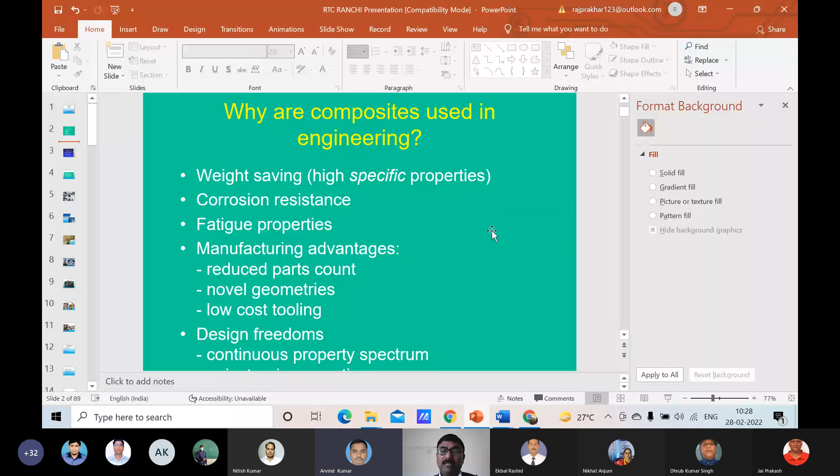Full screen is visible, Arvind? Yes sir, now it is visible sir.

So it is weight saving, then corrosion resistance, it has fatigue properties, manufacturing advantages, reduced parts count, novel geometries, and low cost toolings, design freedoms, continuous properties spectrums.

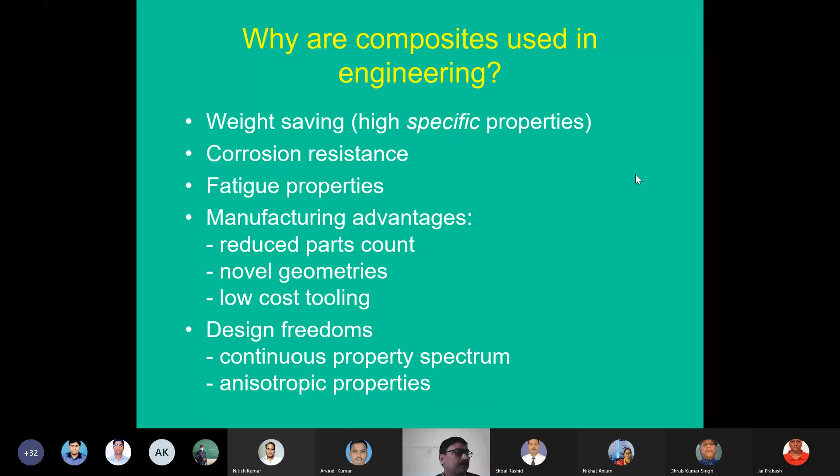So for composite materials, the fundamental consideration is how do composite materials differ from other engineering materials? What are the constituent materials and how do their properties compare? And how do the properties of composites depend on the types, amounts, arrangements of the constituents, and how are composite products made, and why do manufacturing aspects matter?

So we have to compare, and after comparing, if we feel that it has better properties, we can go for the replacement.

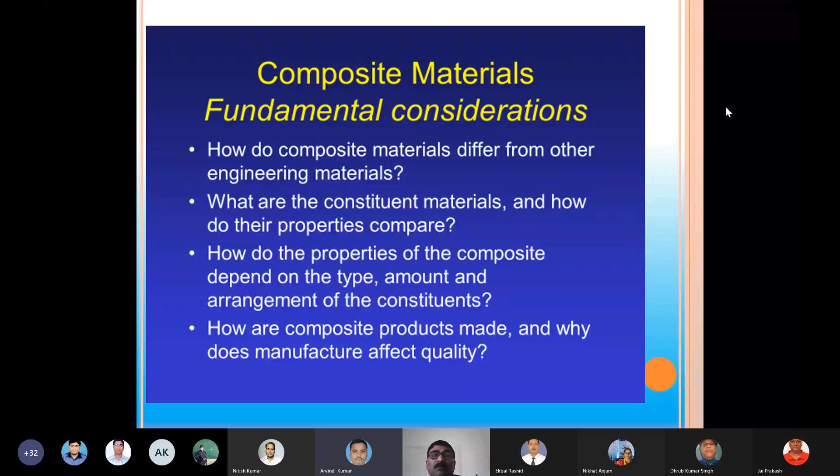But it is not having widespread use. Why is it not widely used? We have a plan, or scientists have planning to replace those alloys by composite materials. Yes, they have had success also, but not in many components or many applications.

The reason is it is costly, there is a lack of design standards, and some production or manufacturing constraints also play an important role in it.

So if you see the composites, there are two constituents in that. One is the matrix, another is the reinforcement.

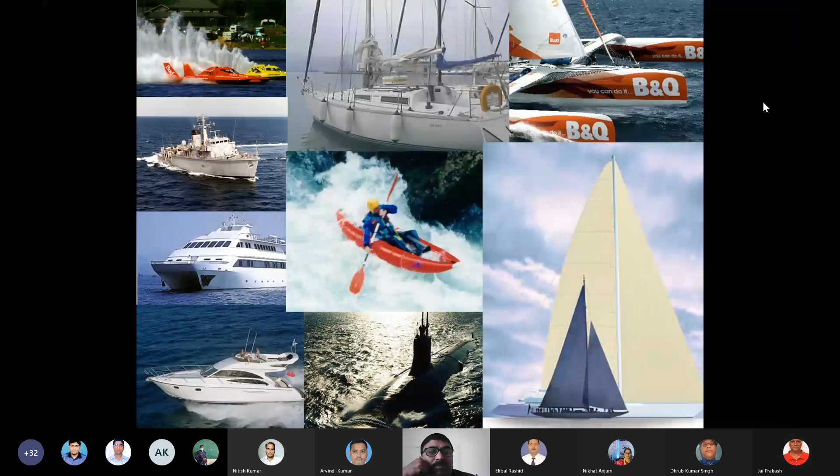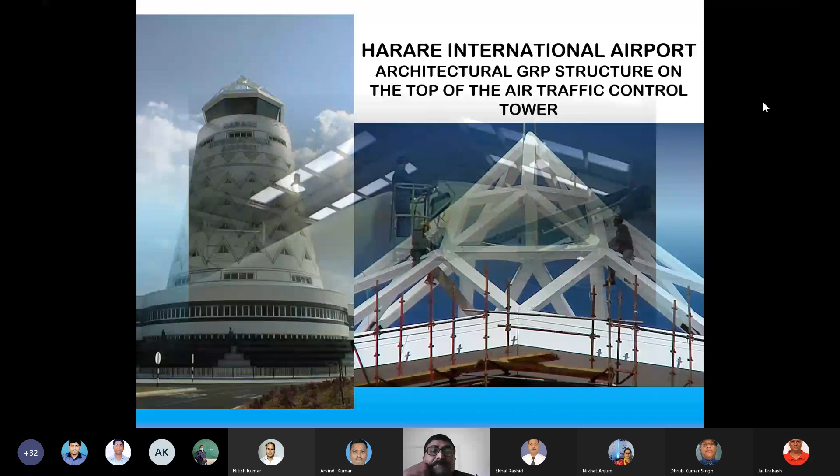So there we can use these applications. Now in constructions also it is used.

If we talk about the advantages, it has aesthetic appeal, ability to mold complex shapes, better surface finish, and lightweight, durability, and corrosion resistance. So these are the advantages of this.

So there is huge potential for polymer composites in civil engineering. But our topic is to go into metal matrix composite, that is aluminum based.

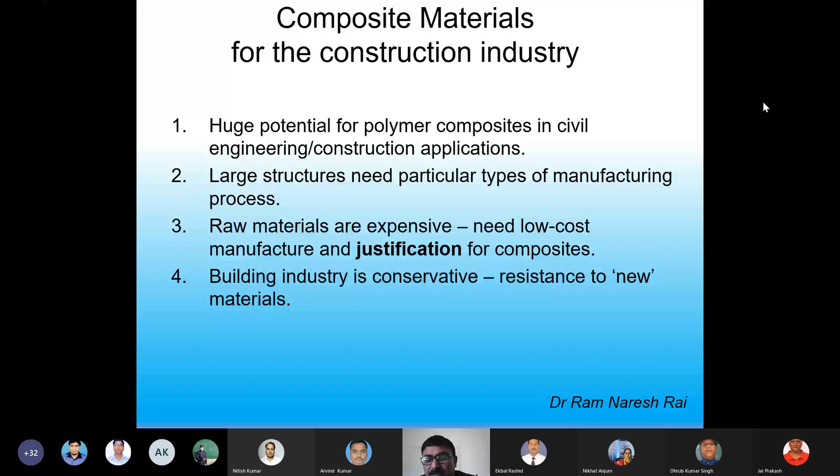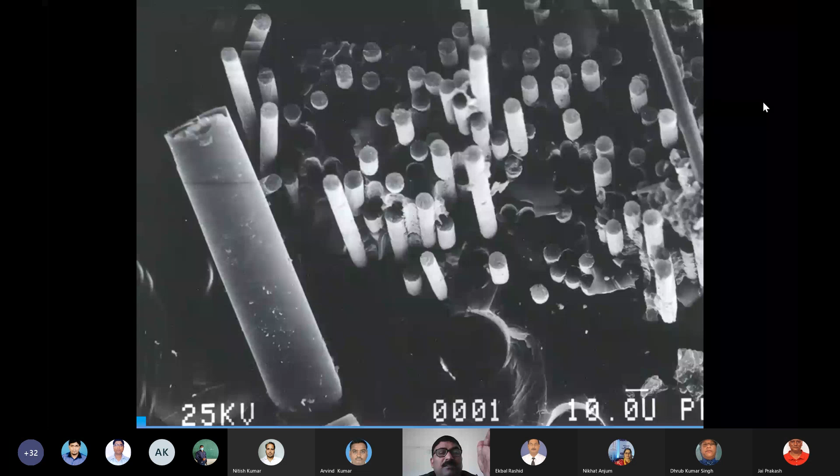And nowadays these composite materials are called novel materials. The materials which are used in the present era for construction, engineering, and scientific purposes are called novel materials.

And if you remember, in the stone age, there was stone, wood. So slowly development has taken place. Then wood, polymers, ceramics, and other applications. So materials have a controlling role in all fields of engineering.

The reuse and recycling components of novel materials is often very poorly thought out. However, the appeal is to the environmentally conscious, for example, products that can be recycled or biodegraded.

So in the present era, rechargeable lithium batteries, you are all aware that cars or automobiles are coming as electric.

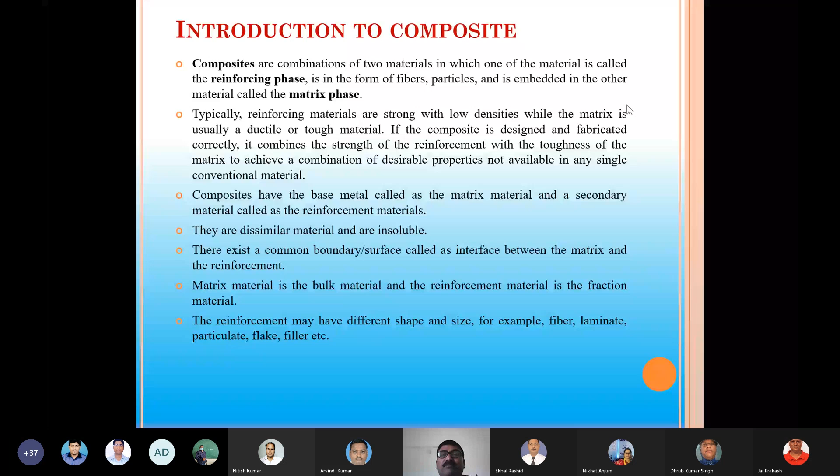If you see the function of the matrix and the function of the reinforcement, we find this binds the fiber together. In RCC structures in civil constructions, you will see cement, sand and water as the matrix, and the rod is the reinforcement. It works as a fiber, but the cement and others are holding those fibers.

Similarly, in metal matrix composites, we have fibers and matrix. It may be aluminum based, magnesium based, or copper based, depending on it being ductile in nature. It should not be hard or brittle in nature. So those materials are chosen as matrix material, and they have different functions.

The other section is the reinforcement. Those reinforcements may be particles or fibers, and they have certain properties or certain functions. So let's talk about the functions of each, that is matrix and reinforcement.

The function of the matrix is to bind the fiber, meaning it holds the fibers and provides rigidity and shape to the structure, and isolates fibers to slow crack propagation. It also provides surface quality, corrosion and wear protection for the fibers, because aluminum, copper or magnesium are corrosion resistant. These are properties the matrix supplies.

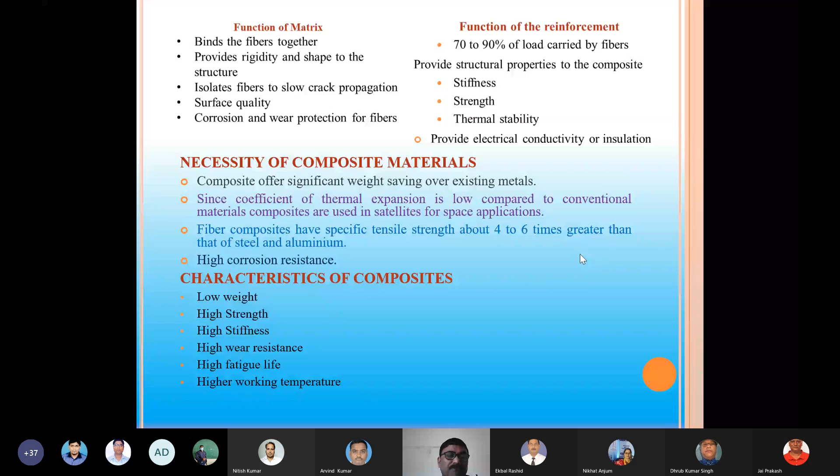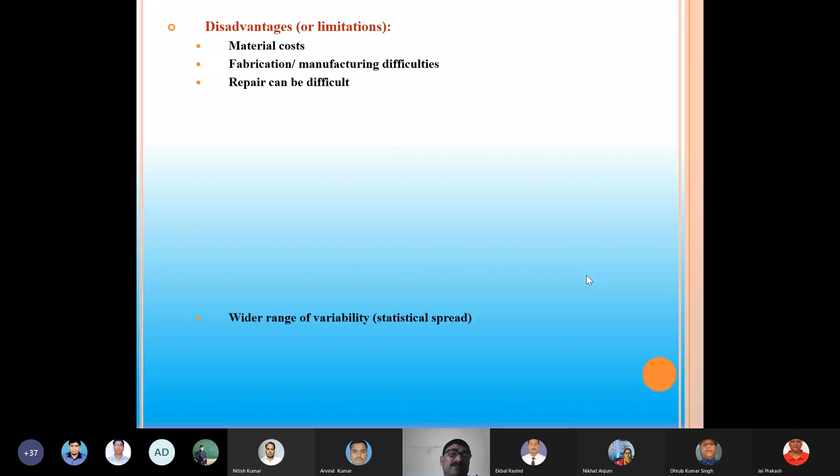Now we'll talk about the disadvantages. Of course, cost is one factor, and fabrication is another factor with cost effects. Repair can be difficult in the case of composites, and there is a wider range of variability. Operating temperature can also be an issue for polymers, if it is a polymer we cannot go beyond about 500 Fahrenheit, but if it is a metal matrix, we can go up to 2700 Fahrenheit.

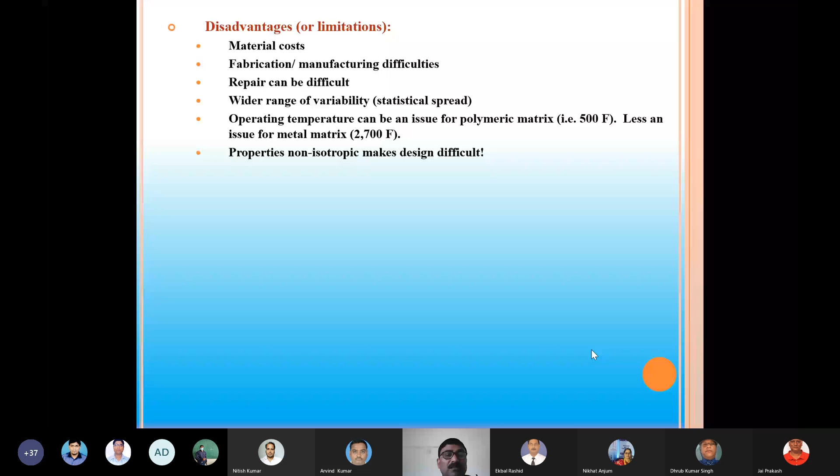Also, the non-isotropic properties make the design difficult, and inspection and testing are typically more complex.

Now we'll see the classification of composites according to the morphology of the reinforcement. If we talk about the reinforcement and its arrangement, we see the unidirectional fiber composite, where the fibers are aligned in one direction, giving strength in that unidirection.

If we talk about the second type, laminated composites, mostly now they are being replaced, but on railway stations, in cinema halls, or on different occasions and places, you will find chairs made of laminated composites.

Then there is the short fiber type, where fiber size is small, and then there is the particulate style.

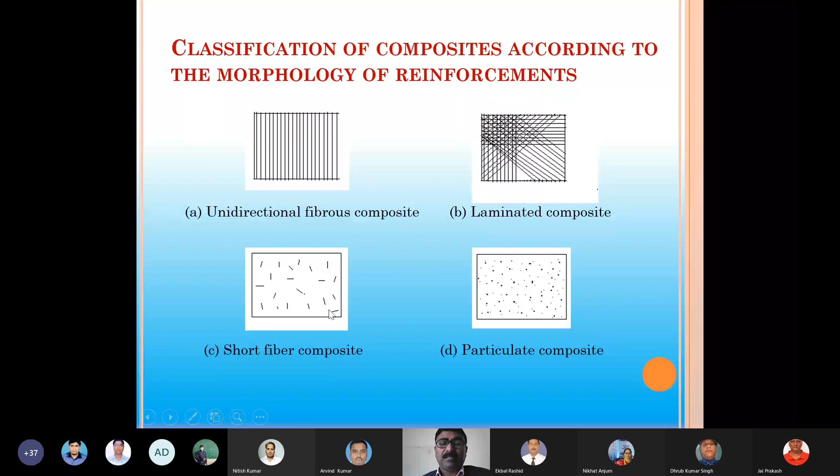And if you see the alignment of those particulates, there is continuous alignment and there is the random one, as compared to continuous.

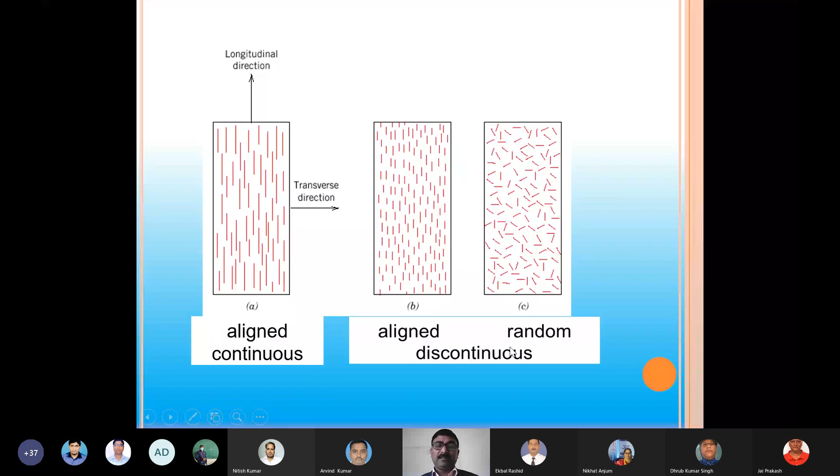Now the matrix has certain properties and the fiber has certain properties. As I said in the definition itself, by combining both individual materials, it gives a certain strength which has engineering applications.

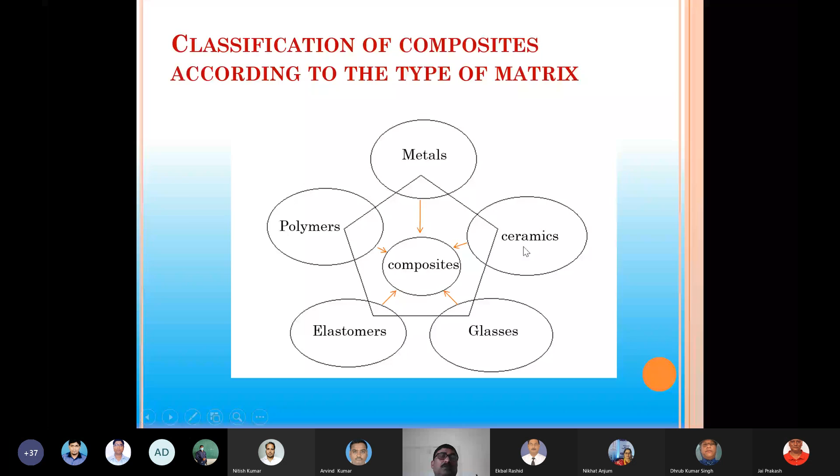Our aim is to focus on metal matrix composites. The metal matrix could be aluminum, titanium, magnesium, iron, copper, or nickel. Examples include aluminum silicon carbide.

These have wide applications nowadays. Aluminum oxide - here aluminum is the base matrix and titanium carbide (TiC) is the reinforced particle. Here aluminum oxide is the reinforced particle, here silicon carbide is the reinforced particle. B4C - boron carbide - I think Arvind has worked on this. If boron carbide is added as reinforcement in the aluminum matrix, we get boron carbide composites. If titanium carbide is added into magnesium as the matrix, we get magnesium matrix composites.

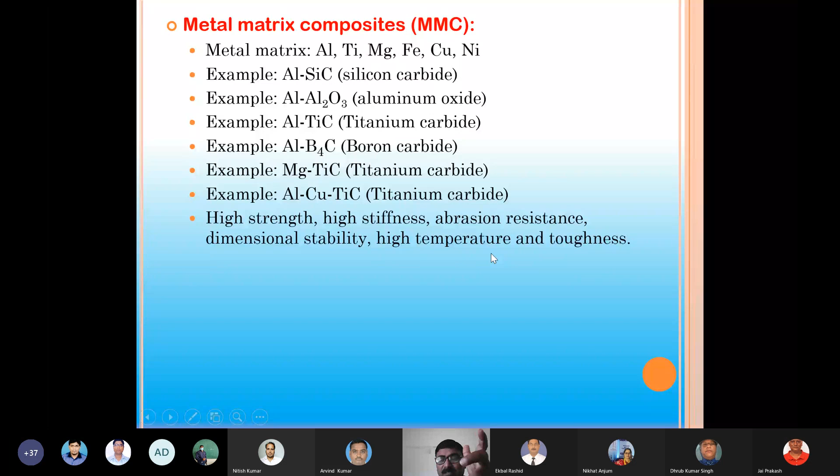Metal matrix composites are a class of materials with the ability to blend the properties of ceramics - high strength and high modulus - with those of metals or alloys, to produce significant improvement in the mechanical performance of the composite over monolithic metals or alloys.

Aluminum alloy based metal matrix composites reinforced by hard ceramic particles have become attractive for automobile and structural applications. The addition of ceramic particles such as titanium borides, titanium carbide, titanium nitrides, silicon carbides, and aluminum oxides to an aluminum based matrix does not considerably change the density of the material, but usually leads to a significant rise in specific strength and modulus of the composites.

As shown in these examples - silicon carbide, aluminum oxide, titanium carbide - these materials can withstand high temperatures and contribute high strength, and also have very good wear resistance. So in engine rings or areas where wear needs to be minimized, these can have applications. In recent years, aluminum-magnesium, aluminum-titanium, aluminum-copper, and aluminum-silicon based metal composites have become very popular.

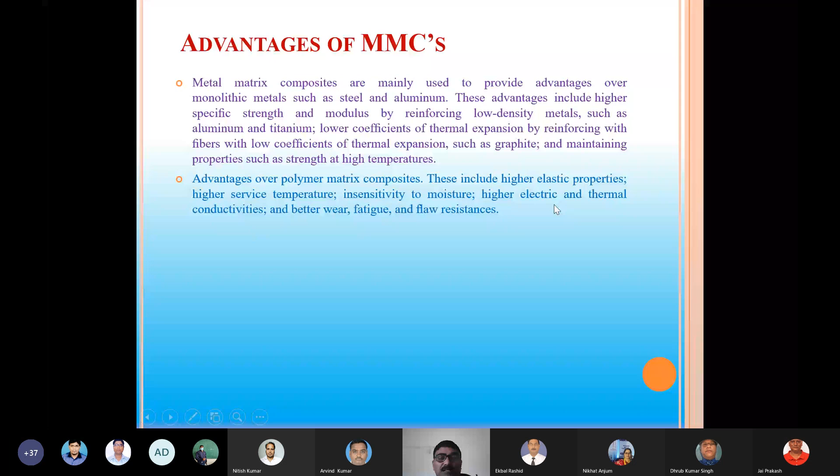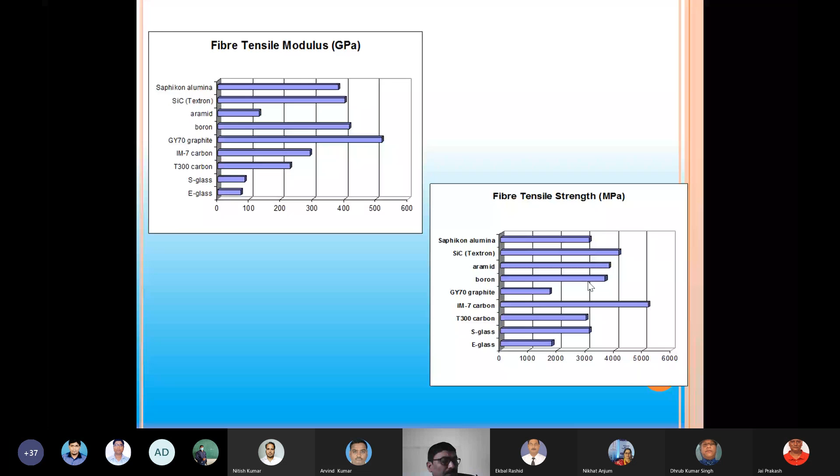So now you are all aware about the matrix. Based on the matrix, you have different composites, and then you have the metal matrix composites. In metal matrix composites, you have seen aluminum, copper, magnesium, and so on as the matrix, and reinforced particles like titanium, silicon carbide, aluminum oxides, or boron carbides. But processing is also one of the factors which plays an important role, a great challenge to industries, so that it should have minimum cost and wide applications.

So there are different processing techniques with the help of which we can manufacture aluminum based metal matrix composites. Traditionally, discontinuous reinforced metal matrix composites have been produced by several processing routes such as powder metallurgy, spray depositions, mechanical alloying, and various casting techniques such as squeeze casting, rheo casting, and compo casting. One method is the in-situ technique, which Arvind used while doing his research work at NIT Agartala. So there are different techniques by which one can manufacture alloys.

It is widely recognized that the properties of the metal matrix material are controlled by the size and volume of the reinforcement, as well as the nature of the matrix-reinforcement interfaces, as we have discussed.

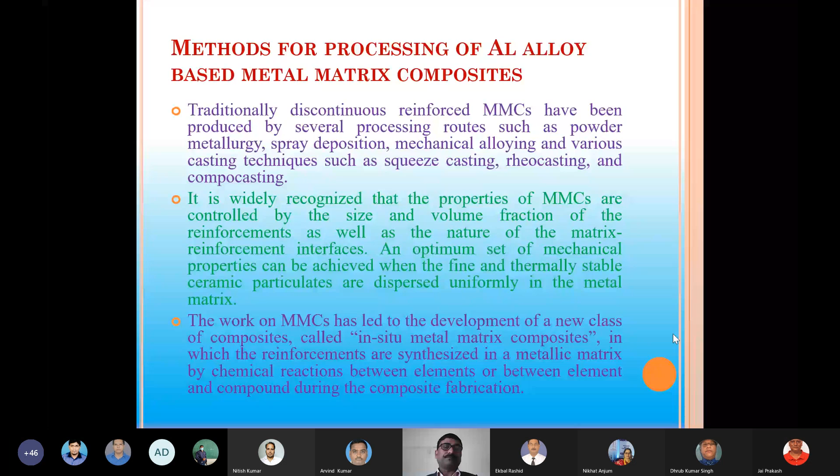A variety of processing techniques have been developed over the last decades in an effort to optimize the structures and properties of in-situ ceramic phase reinforced metal matrix composites. However, the terminology in the literature for the processing routes is inconsistent and confused. Koczak and Premkumar have suggested that in-situ reactions can be categorized in terms of starting phases such as gas-liquid, liquid-solid, solid-liquid phases, but an effective categorization and naming of the processing routes has not so far been established.

So many researchers are further working; however, they are developing by following the gas-liquid, liquid-solid, or solid-liquid way. Just a minute, audience please, give one minute.

We categorize the processing methods used to manufacture in-situ metal matrix composites according to the temperature of the metallic matrix and the reactants during processing. Now you may be aware that there's in-situ and another way called ex-situ.

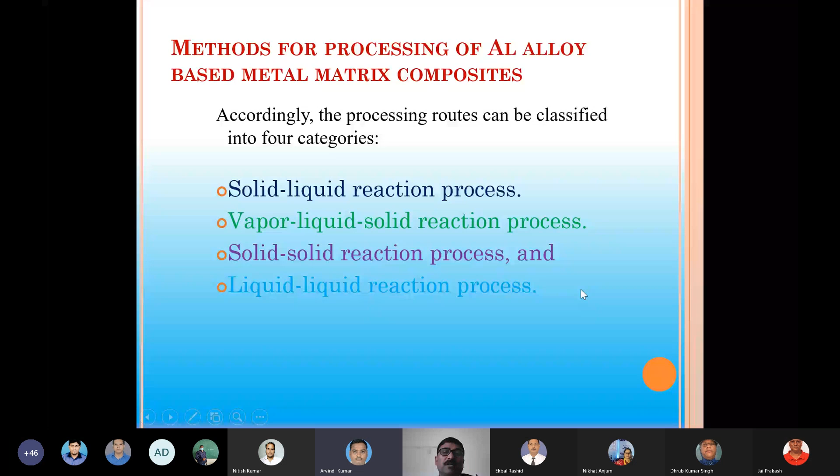Solid liquid interaction means reaction process. In this process, reactants like elements or compounds react in-situ to form reinforcement phases in the presence of a third liquid, the metallic phase, and reactants react with some components in the melt to form in-situ ceramic reinforcement particles. That way you can develop the composite materials.

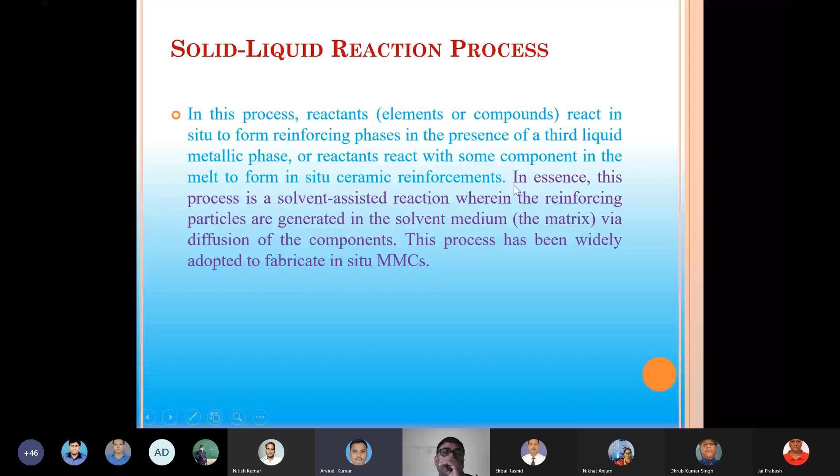Another way is solid liquid reaction, meaning the liquid is the base matrix, and if you add a solid like B4C, TiC, or aluminum oxide, a reaction will take place between the solid and liquid to form the solid liquid reaction. That, in other words, is called ex-situ.

According to the processing features, this process can be further divided into small groups. Some frequently used processes are: self-propagating high temperature synthesis, exothermic dispersions, reactive hot pressing, combustion assisted casting, direct reaction synthesis, flux assisted synthesis - these facilities are available in our lab, flux assisted synthesis is what students are doing here - and rapid solidification processing.

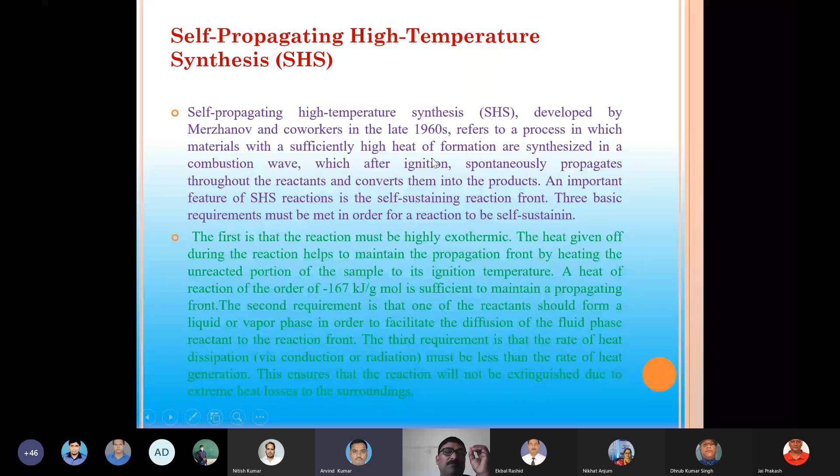Self-propagating high temperature synthesis was developed by Merzhanov and coworkers in the late 1960s and refers to a process in which materials with a sufficiently high heat of formation are synthesized in a combustion wave after ignition. These are the different ways of processing.

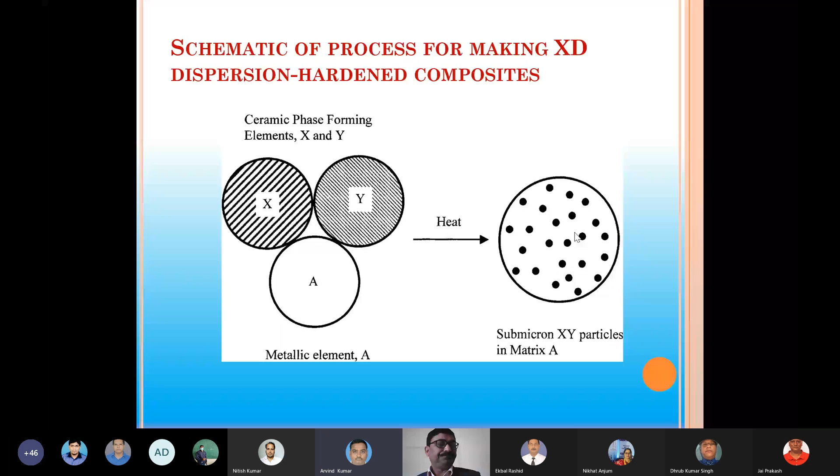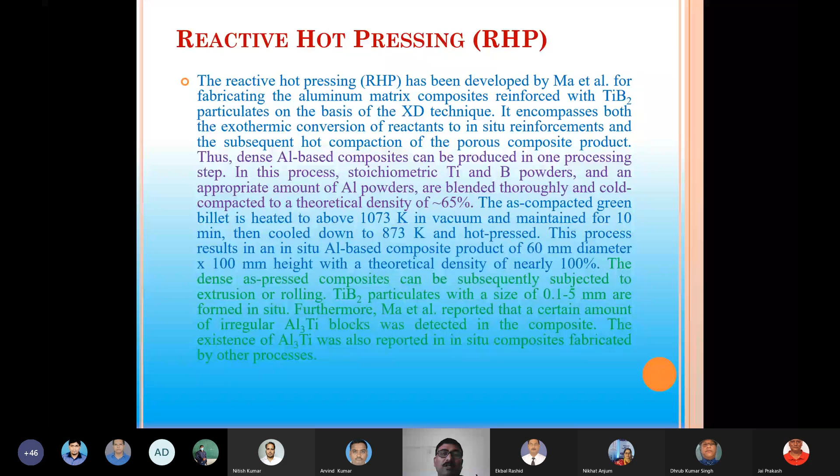The reactive hot pressing technique was also developed by scientists - TiB2, titanium boride particles, can be developed on the basis of XD techniques. It encompasses both the exothermic conversion of reactants to in-situ reinforcement and subsequent hot compaction of the porous composite products. You might have heard nowadays about metallic foam - this is one of the products that can be developed by these techniques.

Then there's combustion assisted casting - I will share this slide with you. Then direct reaction synthesis: this refers to a process in which reactant powders, or compacts of reactant powders, are directly added into the molten metal, and ceramic reinforcing particles are formed in-situ through exothermic reactions between the reactants and between the reactant and some components of the metal. This is another processing method.

Then flux assisted synthesis.

Here we can use potassium tetrafluoroborate and potassium hexafluorotitanate. These halide salts are used to enhance the interface reactions, or the interface bonding between the titanium and the borons, which improves the properties.

After the reactions, stirring is stopped in order to remove the slag containing the halide. This slag at the top is removed from the molten composite, and it is cast into a mold.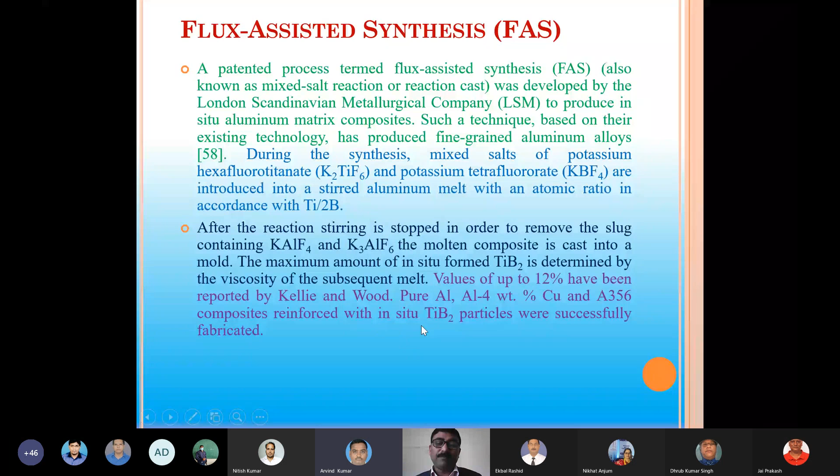The maximum amount of in situ formed TiB2 is determined by the viscosity of the subsequent melt. Values up to 12% volume fraction have been reported. Pure aluminum and aluminum with 4% copper, and A356 composites reinforced with in situ TiB2 particles, were successfully fabricated and have wide applications.

So for the flux assisted synthesis, these facilities are available in our lab, and our scholar has used these facilities.

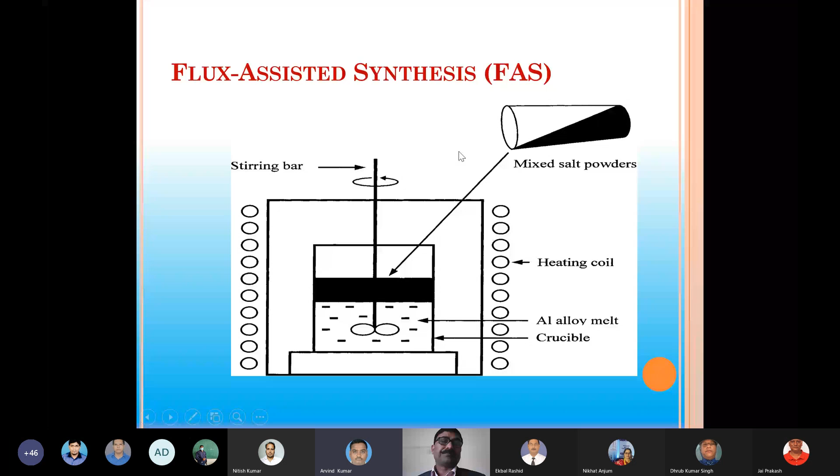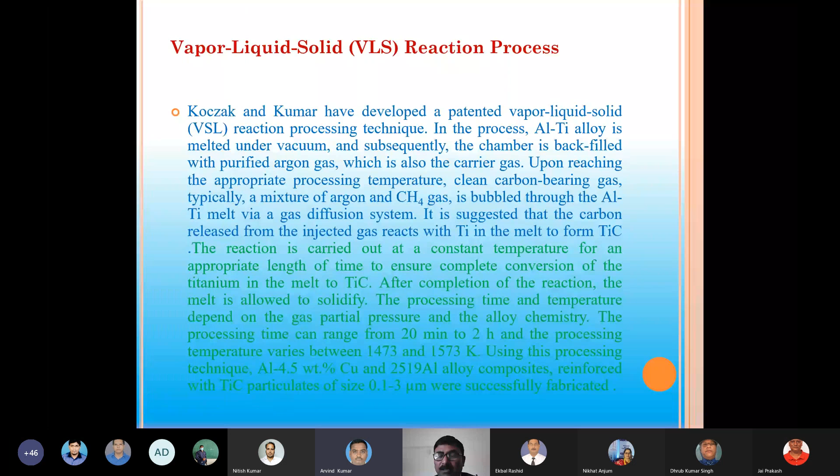Rapid solidification process, and then introduction to vapor liquid solid reactions. There are different processes by which one can develop these composite materials. I'm not going to talk much about this.

Mechanical alloying - since you are all mechanical engineers, you might be knowing this method, where powders are taken from different elements and then alloyed using ball milling machines. This gives us mechanical alloying, a solid state powder processing method.

In this case, different powders of individual elements are taken and placed into the ball milling machine, where mechanical alloying occurs, and later it is compressed, and then we get the composite materials.

This solid state powder processing method involves repeated cold welding and fracture of the particles as a result of high energy ball-sample collisions. This method can be used to produce fine grained alloyed powder particles in metals and metal ceramic systems.

My dear participants, by these methods we cannot go for mass production or bulk production. For small components where high properties are required, this mechanical alloying process can only be used.

The reason is, we have two individual particles in the solid state, and in mechanical alloying there are different balls that compress those particles. Those particles collide with each other due to high energy ball-sample collisions, and then they get impacted, and then you get this result.

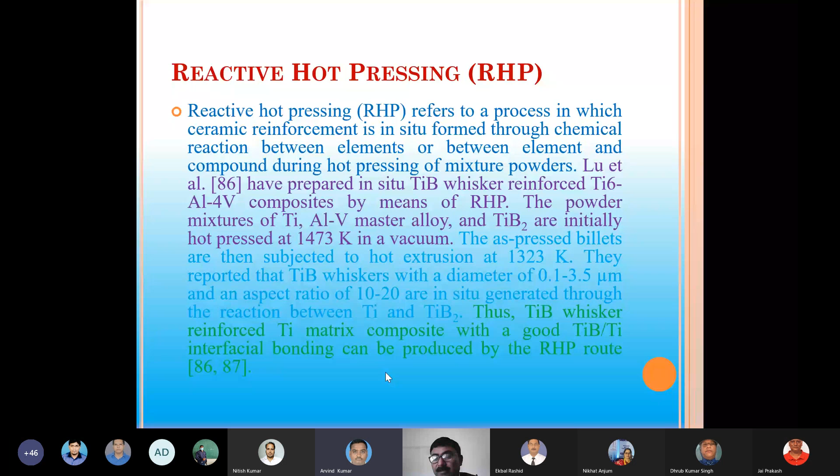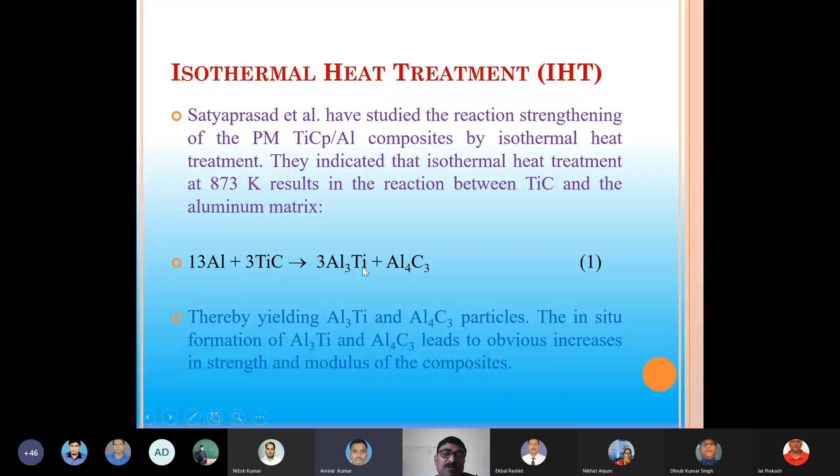Isothermal heat treatment process, where aluminum reacts with carbon and titanium carbide, forming titanium aluminide and aluminum carbide, as shown in equation 1. At lower temperature this is available, but at higher temperature, titanium aluminide decomposes and titanium separates out, and this titanium reacts with carbon to form titanium carbide.

Then the liquid reaction process. Now let's talk about the applications.

Applications of metal matrix composites include space, military, and transportation applications. In space, boron aluminum tubes are used in support of the fuselage frame, in addition to decreasing the mass of the space shuttle by more than 145 kgs.

For military applications, metal matrix composites such as silicon carbide aluminum composites satisfy the requirement because they have high micro-yield strength. In addition, the volume fraction of silicon carbide can be varied to achieve a coefficient of thermal expansion compatible with other parts of the system assemblies.

For transportation, metal matrix composites are finding use in automotive engines that are lighter than their metal counterparts, as well as in automobile, marine, electrical and electronics, sports, and space applications. These are some examples of where composite materials find applications.

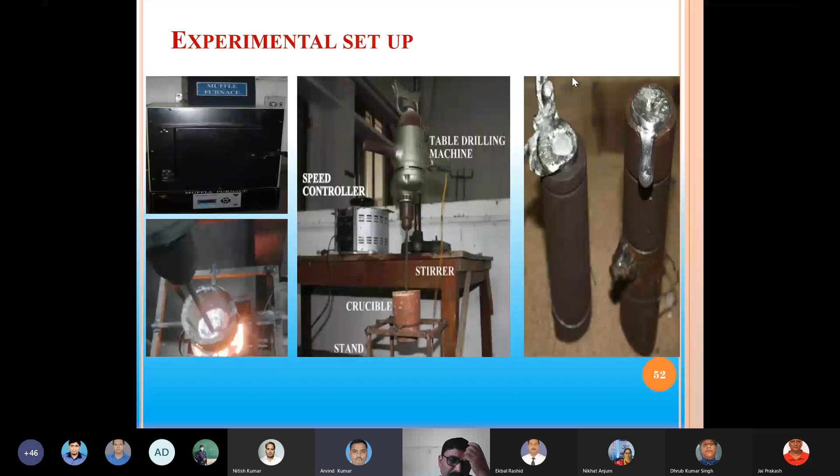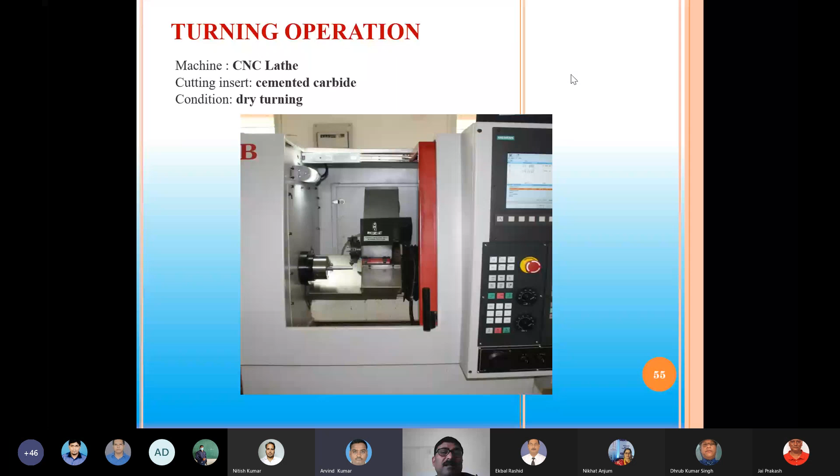We have facilities where the materials are prepared, and they have done hardness testing and turning operations. We have the facility for this, and they have used this lab.

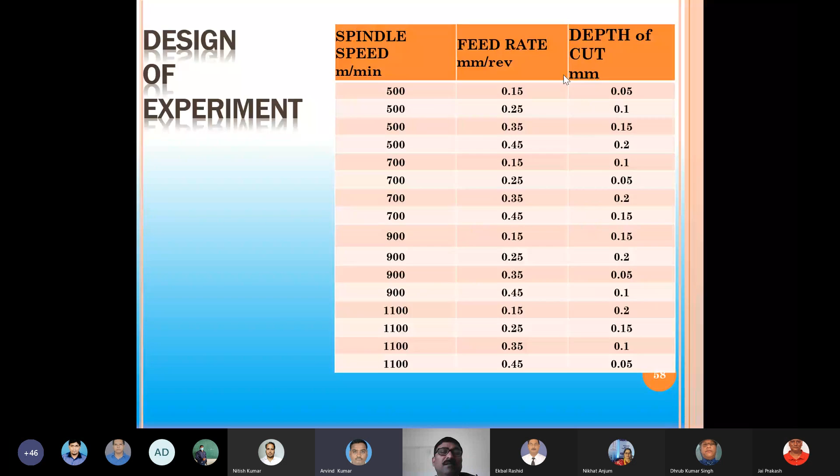They used design of experiments, performed the experiments, and then proceeded to machining operations. During machining, we observe differences depending on the material type.

If we machine ductile materials versus brittle materials versus composite materials, we find different orientations of the chips that come out. For example, in ductile materials, the chips formed are continuous but of irregular shapes.

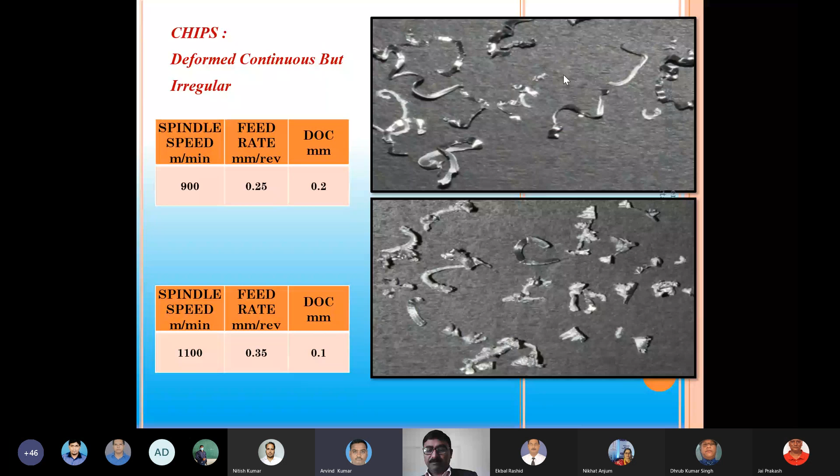These are the different spindle speeds and feed rates they have taken, along with further observations. When using composite materials, the chips are discontinuous type.

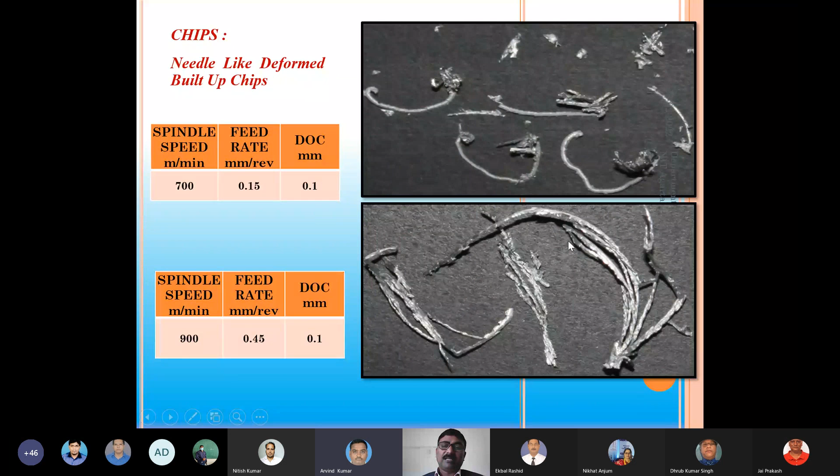Here is the case of aluminum silicon carbide, and this is aluminum titanium carbide, and so on. Overall, once you machine these aluminum-based materials, you will find that tool blunting takes place, or the tool life will be reduced.

Here my friend has shown results once they machined this composite with only 1.5% silicon carbide, compared to the pure alloy, and also with 1.5% titanium carbide. We observed that in these cases the tool life will be better, meaning the edges are less distorted.

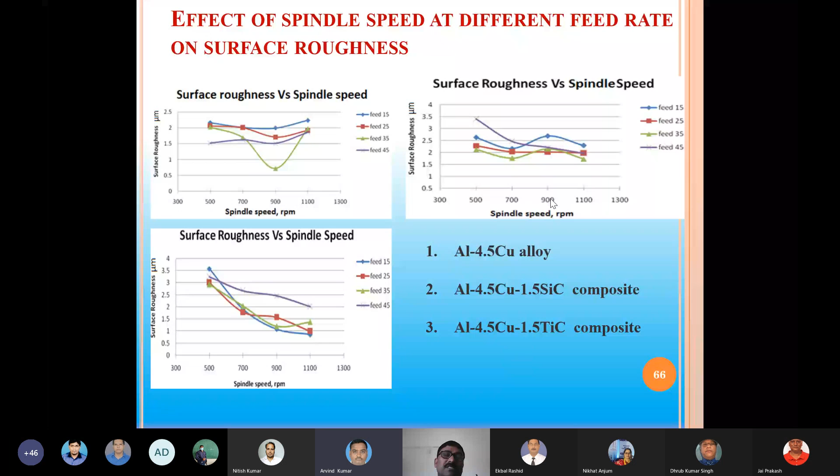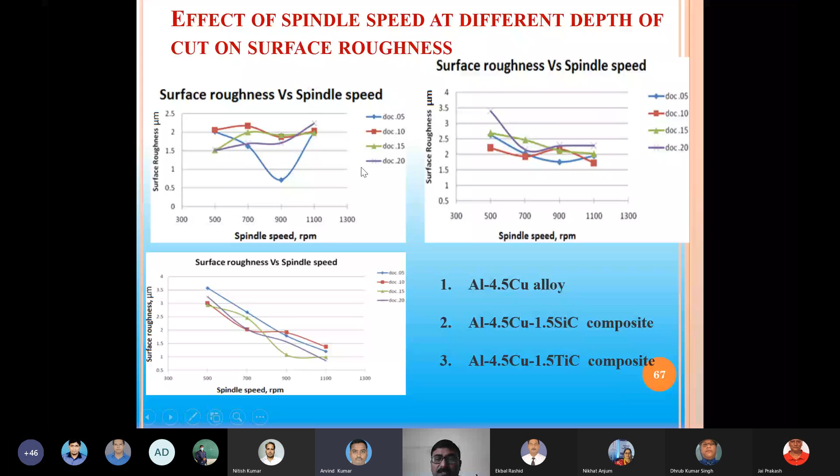Then the effect of spindle speeds at different feed rates on surface roughness. They have graphical representations about surface roughness versus spindle speed, along with their observations. If you see those surfaces, we have a 3D profilometer in our lab.

There you can see the 3D profile of the machined surfaces. It appears as a very nice surface appearance, but if you look at the 3D profilometer data, the surface actually looks like this.

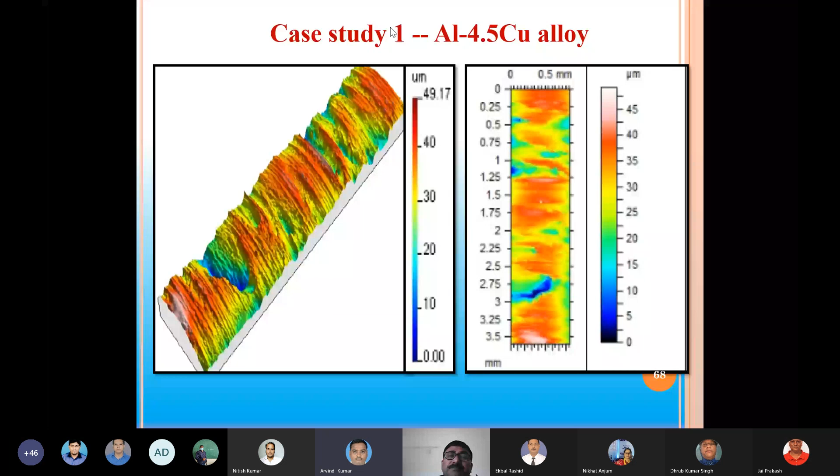These are some case studies of different composite materials: the case of 1.5% silicon carbide composites, and the case of titanium carbide composites, along with their observations.

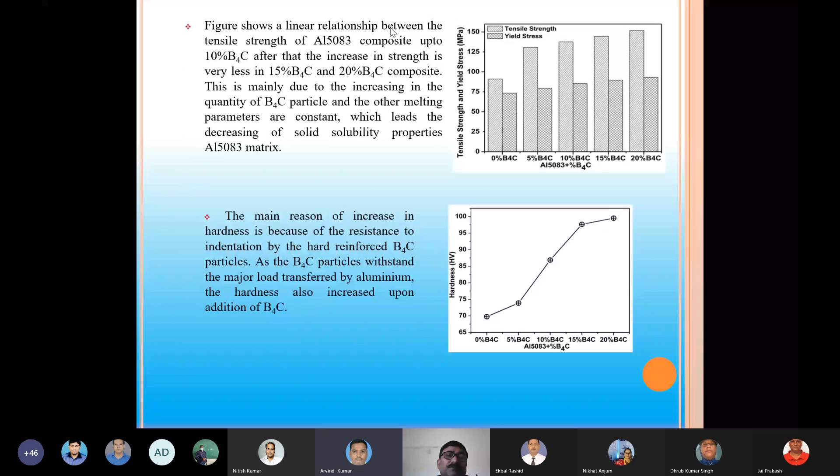Further, they studied the mechanical properties and performed XRD analysis. Another aspect is the optimization techniques they applied, where before optimization they considered parameters like T-on, T-off, and so on.

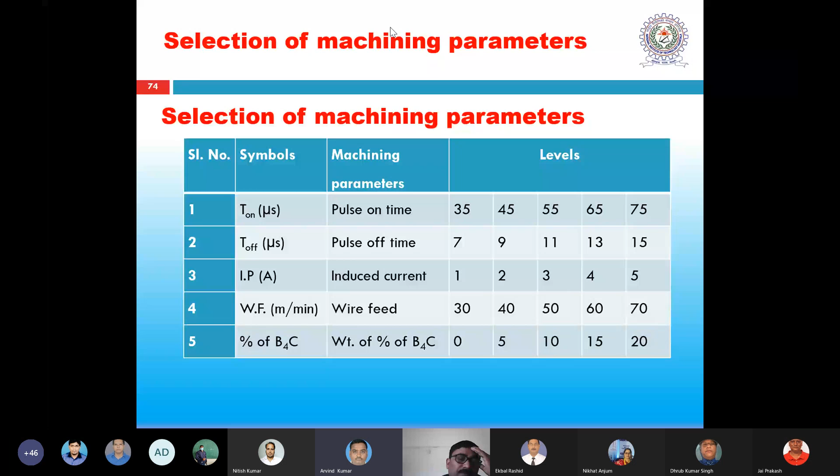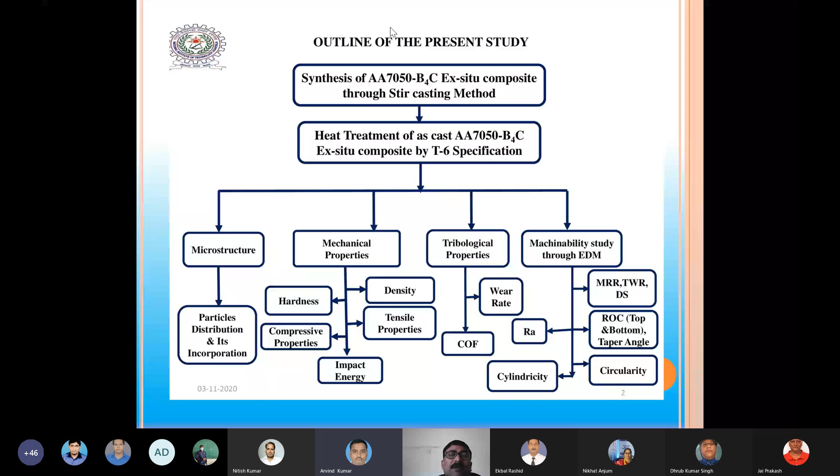This outlines how they started their work and the outline of their project, including the experimental procedure they followed. This is another scholar who performed these experiments in our labs.

And then the tribological properties—Arvind, I believe this is your work, isn't it? Yes sir. So this is the tribological test they performed, and they observed that this material has better tribological properties.

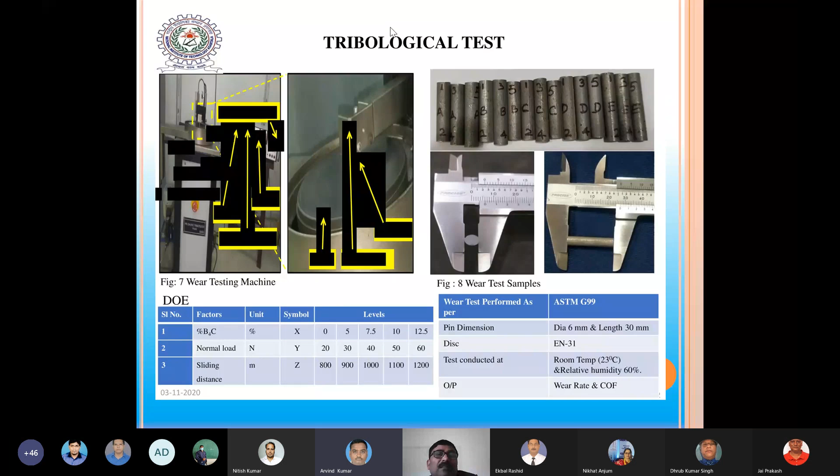Then the die sinking EDM—another student used this technique, and they studied the microstructure of those aluminum-based metal matrix composites, observing the distribution of the reinforcement particles in the structure.

If the distribution of the particles is maintained properly, you get better strength. If the distribution of those particles is not good, as in Arvind's case with B4C particles, the strength is affected.

So the distribution is okay, but if more distributions of titanium carbide particles, boron carbides, or other nitrides are there, then the strength will improve obviously. As per the Hall-Petch equation, as the grain size becomes smaller, the strength becomes better. So there's a correlation of microstructure with mechanical properties.

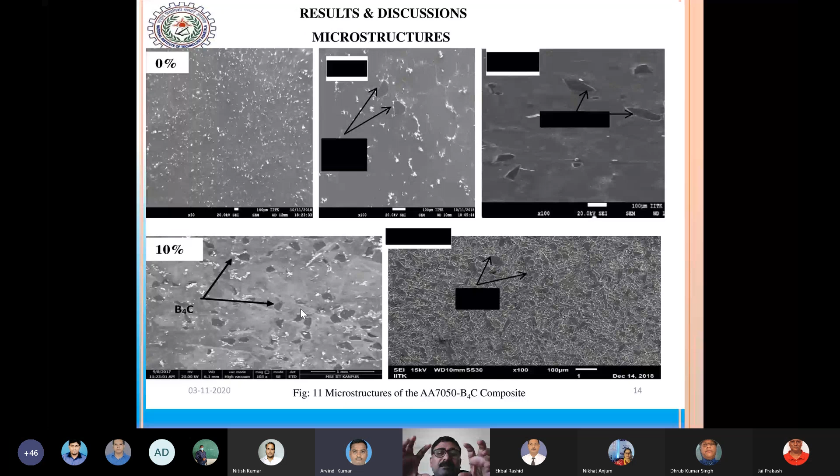These are their observations from TEM and SEM analysis, where they measured density, hardness, and tensile strength. They also noticed about the surface - when they did machining of the surfaces, they observed how cracks or particles flow from these surfaces. Sometimes depending on hardness, it impacts the tip and damages it, making the tool blunt or reducing its sharpness.

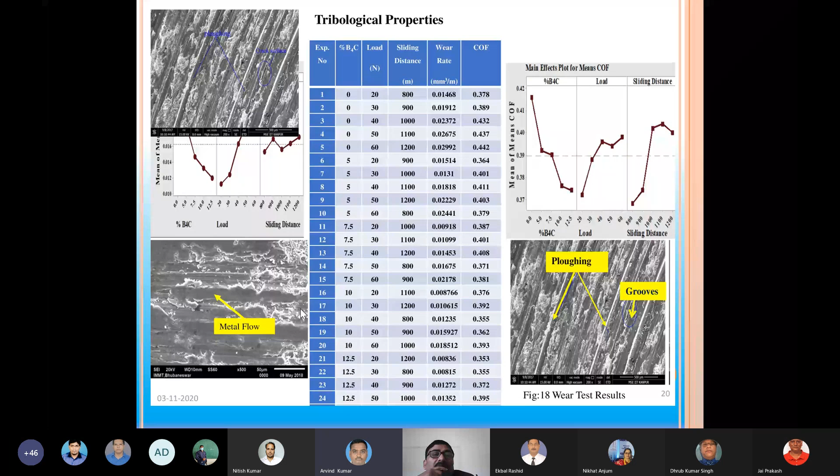And then there's the wear test they conducted, and they also used electro discharge machining and observed the analysis. So by this way they have done some analysis, and these are their conclusions. These slides I will share with you.

If we talk about the observations, the wear rate of aluminum 7050 B4C composites decreases with the addition of B4C in the matrix, and the mean wear rate for the 5%, 7.5%, 10%, 12.5% composites are noted. These are their observations and results.

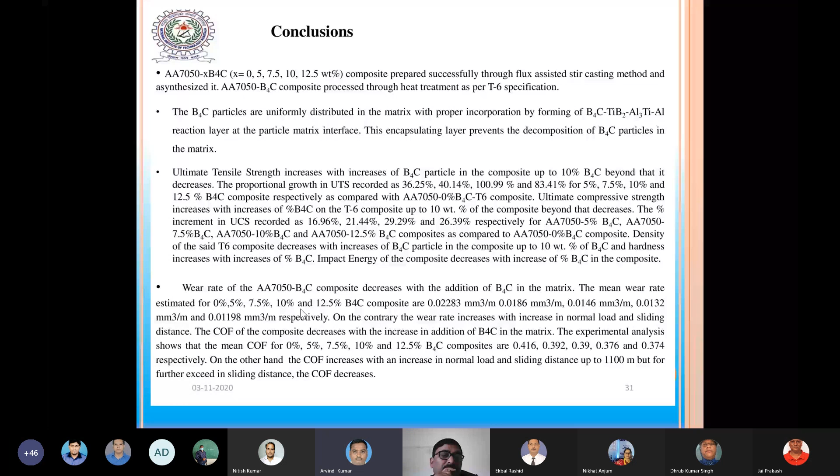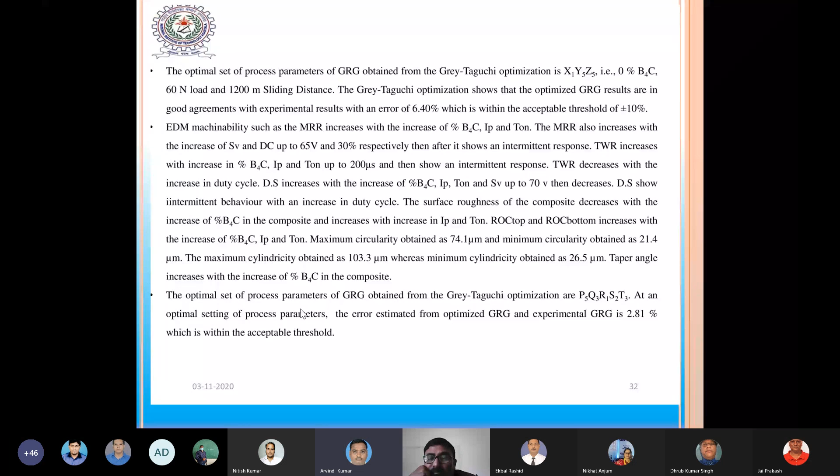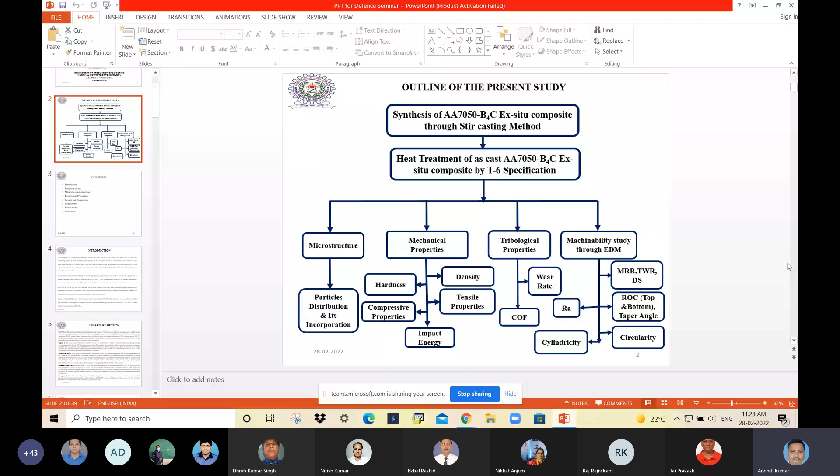And after that, once we got the material, we did mechanical testing to evaluate the composite. So, yeah, not going much into it. One second - so basically, the contents were like this.

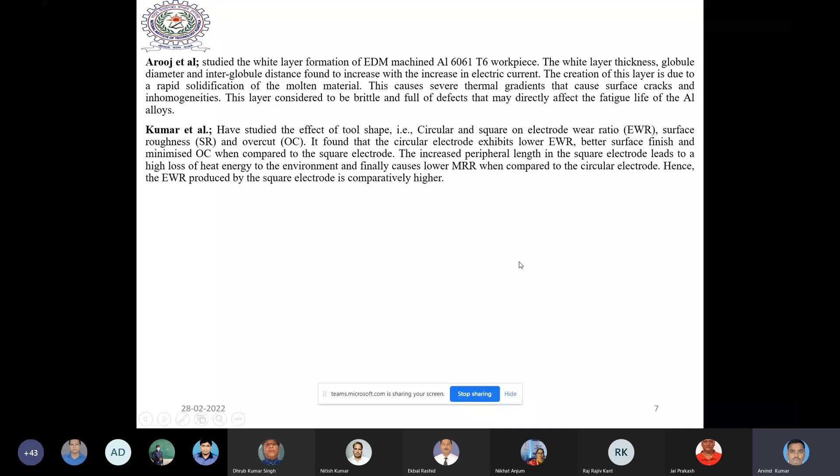As in every PhD work, it happens right from introduction, literature review, motivation and objective, experimental procedure, result and discussion, conclusion, future scope. The motivation was very clear to develop a composite material.

Aluminium alloy B4C based composite material, since B4C has good affinity towards the aluminium. So I have chosen this reinforcement ceramic particle B4C, and the size was 100 micron B4C particles which I have used here.

The objective was also clear to develop a composite. I have gone up to 12.5% of B4C. Then through flux assisted stir casting, we have gone for heat treatment, then several mechanical testing.

Basically for the bond formation mechanism, we have tested through several XRD. Then we have gone for FESEM, and we have established a quaternary layer of B4C, TiB2, Al3Ti, aluminum titanate, and aluminum particle matrix interface, and the microstructure. I have published one paper also on this, and that was highly recognized.

Then we have gone for several kinds of mechanical testings, right from density, hardness, tensile, compressive, and impact test. After that, we have tested the tribological property of the developed composite material, using an optimization method which also proved that the method we selected was good.

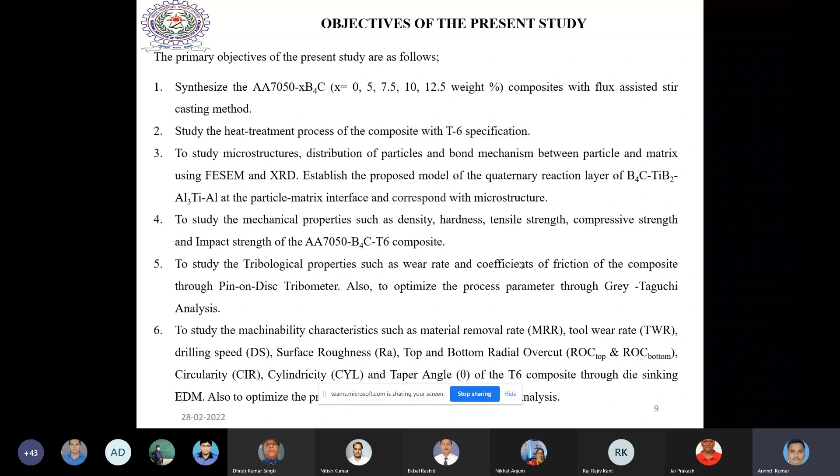And then at last, we have also done the machinability property of the developed composite, with output through electro discharge machining. So basically, this was the experimental setup which I have used.

I have used aluminum alloy 7050. Here, the major alloying element is zinc, that is 5.88. And boron carbide I have used, with size 100 to 150 micrometer.

Since I have mentioned flux assisted, so I have used flux assisted stir casting method. The flux was K2TiF6, that is potassium hexafluorotitanate, and one degasser I have used, that is hexachloroethane. Amalgamating everything together, this is the iron mold I have used. This is the stir casting method which was there at NIT Agartala.

I tried from 700 to 800 degrees centigrade. We should not pour it directly at room temperature. So that heating chamber was developed so their temperature was fixed at 450 to 500, moreover 400 to 450 degrees centigrade.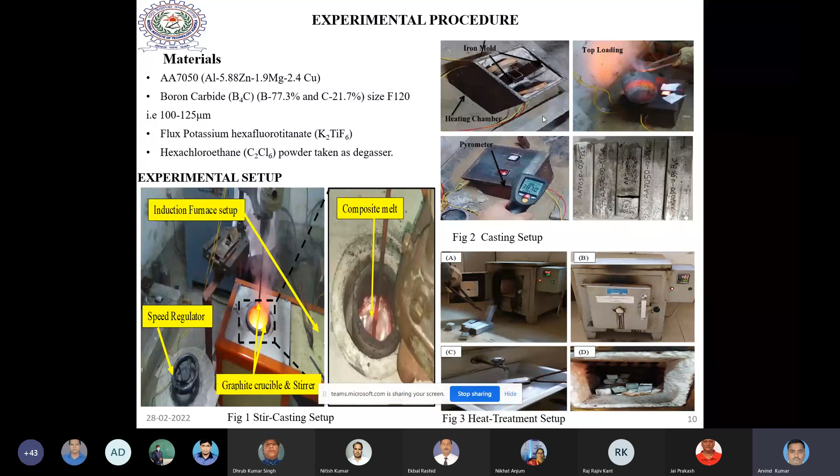Then we poured it in, and we went for slow cooling so as to reduce the shrinkage allowance. Then for heat treatment, I have used this setup. These were the test samples made, and density was checked accordingly.

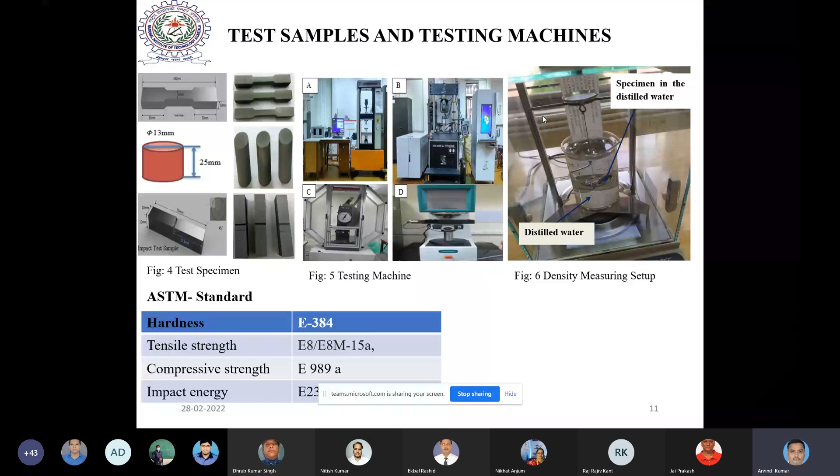This was the tribological setup which Sir has also shown. These are the small components, small size. The size was fixed at 30 in size and 6 diameter, 30 in length.

And this die sinking method I have used. So these were the properties, these were the parameters which I have selected.

This is the composite, and here is the copper pin I have used as a tool. And of course, the hardness of our composite was very high compared to this copper.

And since I have used electro discharge machining, the setup is like this. So the major finding of this composite was here, right from 0%, 5%, 7.5%, 10%, and 12.5%.

I have seen that as I increased the percentage of reinforcement, we have a uniform distribution of this. This distribution has shared the load which was coming on the composite, and hence the load bearing capacity increases.

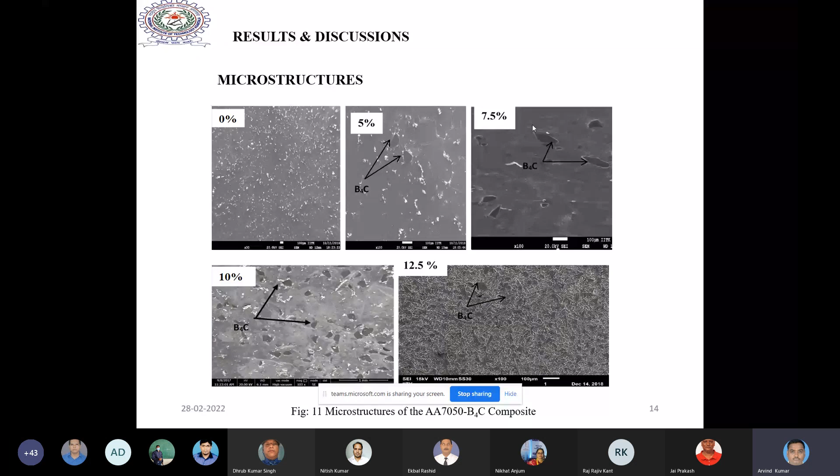The motive was to develop a reaction layer. When B4C particle comes in contact with the aluminum matrix with the presence of flux, there is a local increase in temperature. Since the melting temperature of B4C is about 2200-2300 degrees centigrade, and aluminum is 660, there is a huge difference between the two melting points. And if it is not melted, then we'll have a solid liquid mixture.

So we tried to put some reagent which has locally increased the vicinity temperature of the B4C particle at the periphery. And there it reacted with the aluminum matrix, and formed a layer. The layer means here you have shown one block.

I have tried to show this reaction layer like this. There is a B4C particle at the center, and just in the vicinity of B4C, there will be a layer of TiB2 or TiB3, titanium boride. Since titanium is the major reacting element, it increases the local temperature near that B4C particle, causing it to melt and react with the matrix, forming TiB2, then Al3Ti, and then alpha aluminum. If this kind of reaction happens, only then can we be sure that our composite has been formed. I was able to achieve this kind of reaction.

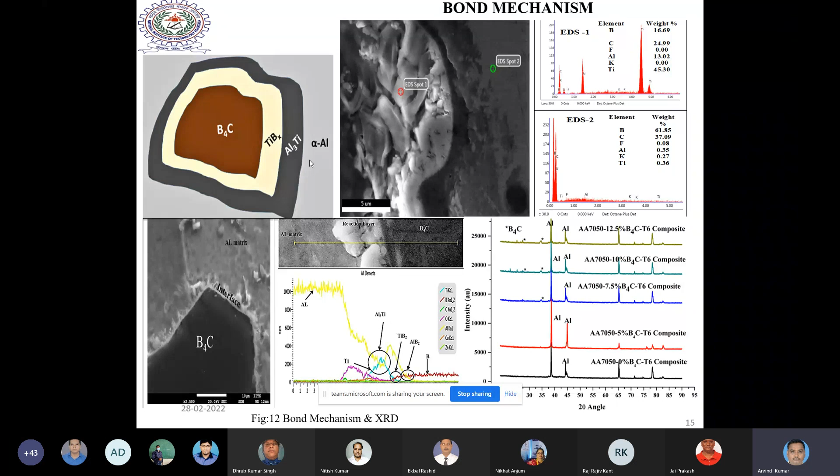So next, this was the density and hardness. This is tensile property. Actually, what happens when you go for a higher increase, there is a chance of porosity. So the optimum temperature and optimum percentage for mixing B4C into aluminum is up to 10%, or even less than that. Beyond that, the property decreases.

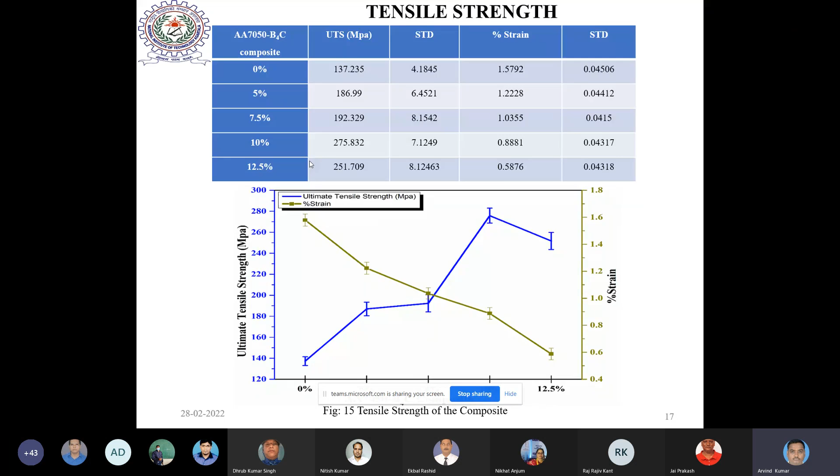Similarly, impact stress also behaves like this. As sir was showing, wear performance has increased since the B4C particle was uniformly distributed. So all the loads coming to the matrix were shared by the particle, and since there is strong bonding, the particle also will not come out from the composite. It has shown a good property.

So beginners can think of making such kind of composite for shoe pad or automobile shoe, because this has good thermal conductivity also, so this can be a good material for brake shoe. Keeping that in view, I have tested the tribological property of B4C based aluminum alloy 7050 composite, since the fatigue strength of this alloy is high compared to other aluminum series. And if we mix B4C, it will have a good wear property.

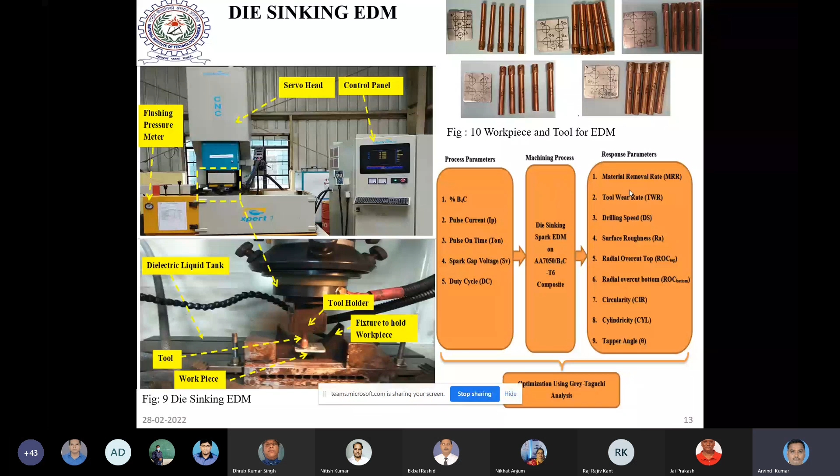So these were the 9 responses I found with this composite, and these were good responses being used here.

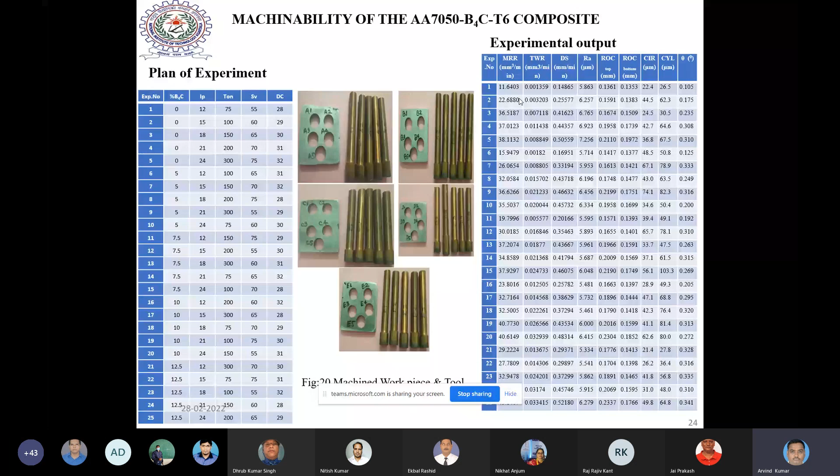So this is the microstructure we get after machining. What happens at the surface is resolidified metal. Actually there was crater development as the current increases.

There will be a bunch of material that gets evaporated and melted, so there will be a local increase in surface roughness. But these are the factors.

There are spherical deposits, suppose this solidifies. Debris will be deposited on the surface, and that can be removed simply by sand blasting or something similar, so you get a smooth surface on the micron level.

Generally it is a very smooth surface we are getting with this, and these are the observations we have gone through.

So this is the conclusion: we have successfully prepared a composite through the flux-assisted casting method and synthesized it. This composite was then put through a heat treatment process.

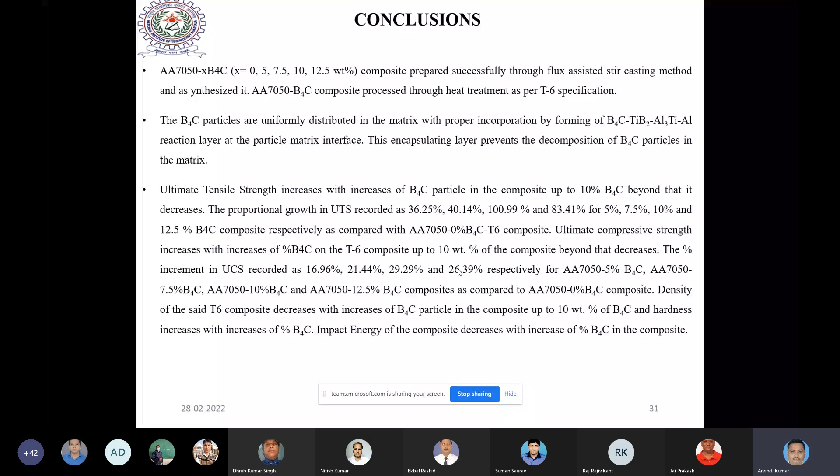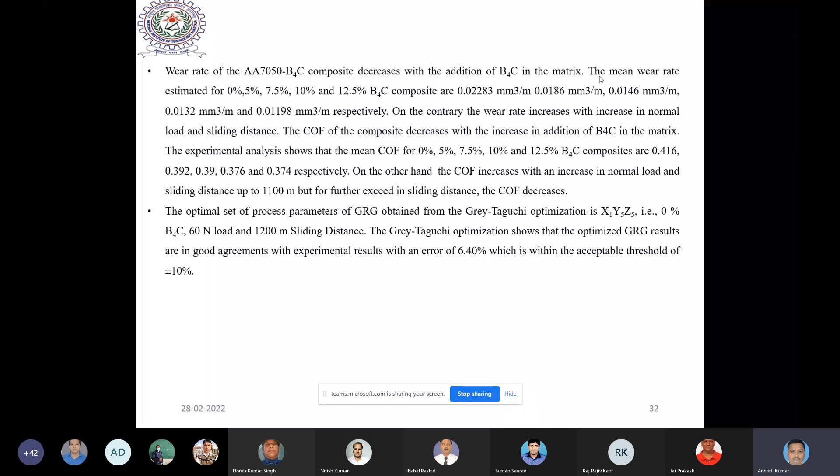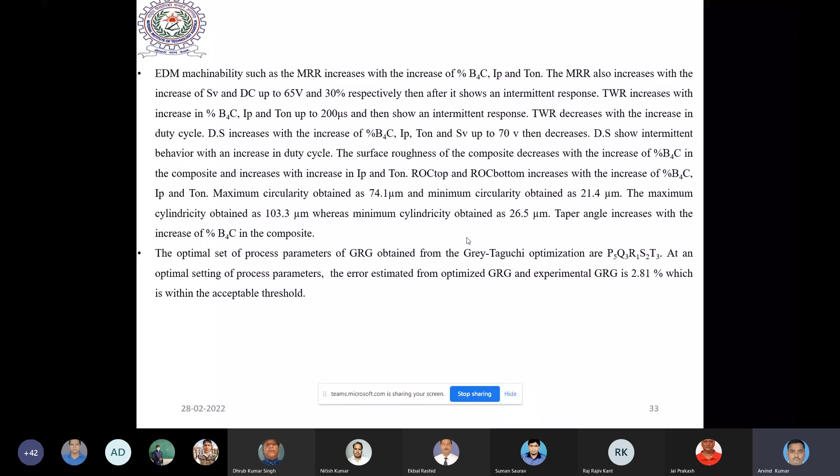Future scope is very clear in this work: secondary manufacturing processes like forging and rolling can be done on this. After making the composite, we have to go for forging or rolling. We have to take care that the particle is not breaking inside. If you go for hard forging, there's a chance the particle will break, and that broken particle will reduce the property. But secondary manufacturing will also always give a good impact, so keeping all these pros and cons in mind, we have to be careful while making it.

So one area is secondary manufacturing like forging and rolling on this composite, and its effect on microstructure, mechanical properties, tribological properties, as well as machinability may further be studied. This is one area for beginners - I am giving you the gap in research so you can continue on this and do your work on this composite if you go for secondary manufacturing processes.

Weldability studies I have not done, so this is another area. You can work on the weldability of this aluminum B4C composite, which may improve its application in industry. Also, weldability study on a rolled and forged composite can be carried out. Weldability is another important issue we can study as a whole.